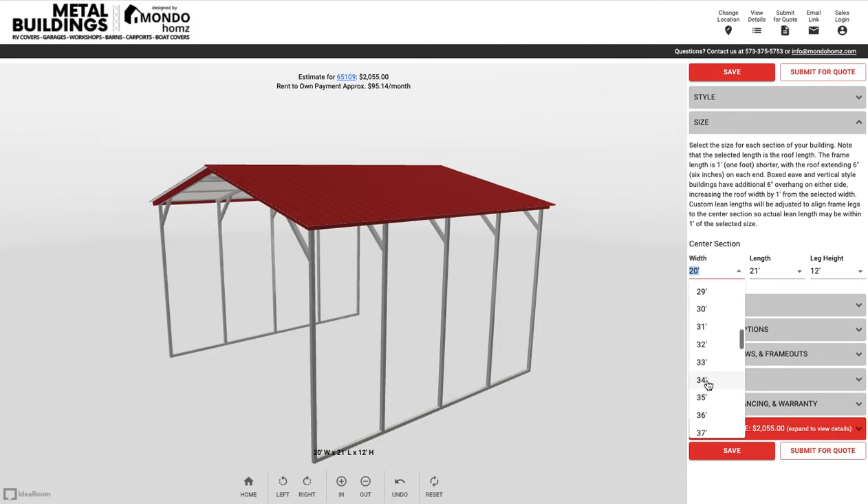So let's get building here. We're going to start from scratch with this building and change some sizes first. I usually go up and talk about the roof, but I want to look at the different sizes here.

Let's start with the size that we end with. You can see here the truss system on a 30 wide. With this particular manufacturer, a 30 wide is a breaking point, so if you go over 30 wide it's a different truss system. But another breaking point below 30 is 24, so I want to show you the difference.

You can see this truss, or this bow, has these supports welded in. And then when we go down to 24, it's a completely different truss system.

So anything over 24, you're going to get that other style of truss where it actually has the supports welded in. This support and these supports aren't welded in, they're actually bolted in at assembly. So this is more of a bow style truss, with no welded cross members in this truss system. That is the biggest difference with these buildings.

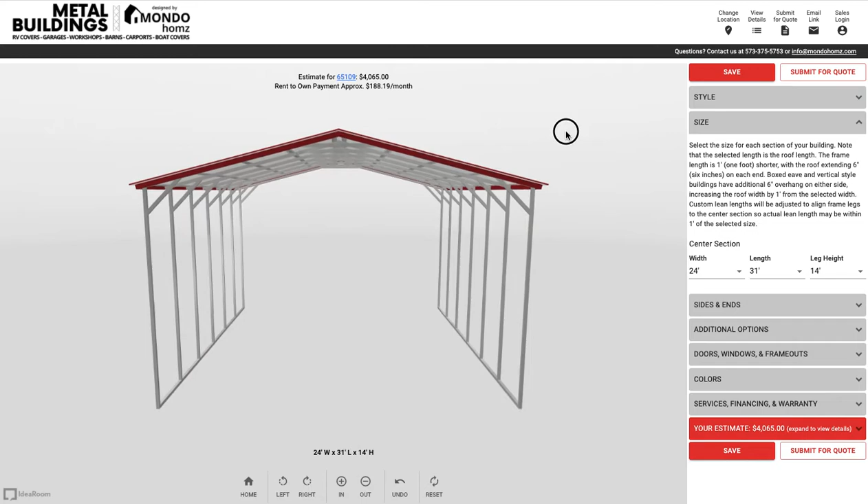And of course there is a cost difference because of the size. So you'd have a cost difference on the size of the building, but also this customer wanted to mount it to a concrete slab, so because your square footage is bigger, you're going to have more cost on the concrete slab as well. And if you were going to insulate this building, you'd have more square footage to insulate, so there'd be more cost there.

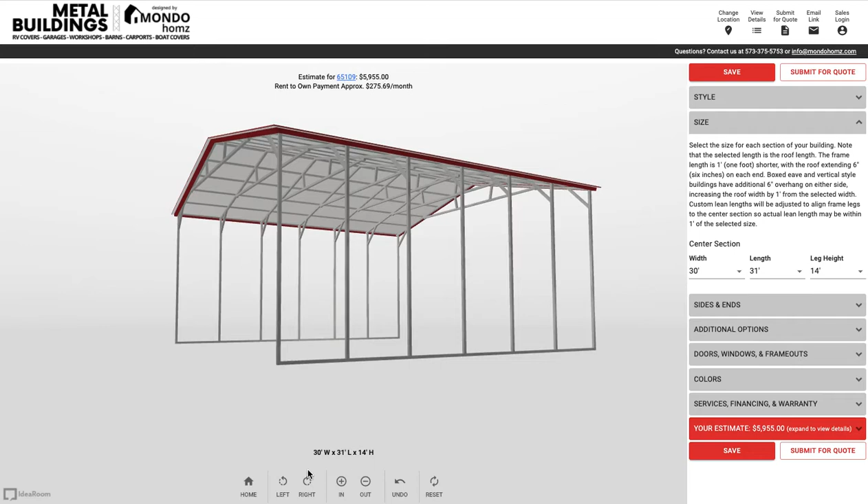So let's start with the size we ended up with, which is the 30. So 30 by 31 — again, 31 is the roof measurement from front to back, and we have 6 inches on each end. What that does is make our footprint 30 wide, and from front to back, 30 long. So it does say 30 by 31 by 14, but the footprint is a 30 by 30, and 14 tall at the eave, or the leg, or wall height.

So we want to enclose this building completely, because this person was going to use it as a paint booth. We're going to show it as that customer that called in wanted it to be.

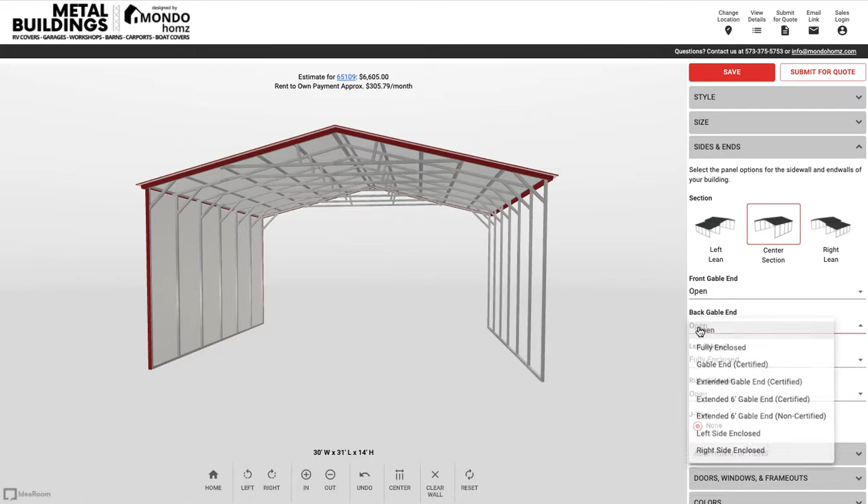Close that. Let's enclose the ends. Again, I'm always going faster than what the program wants to go.

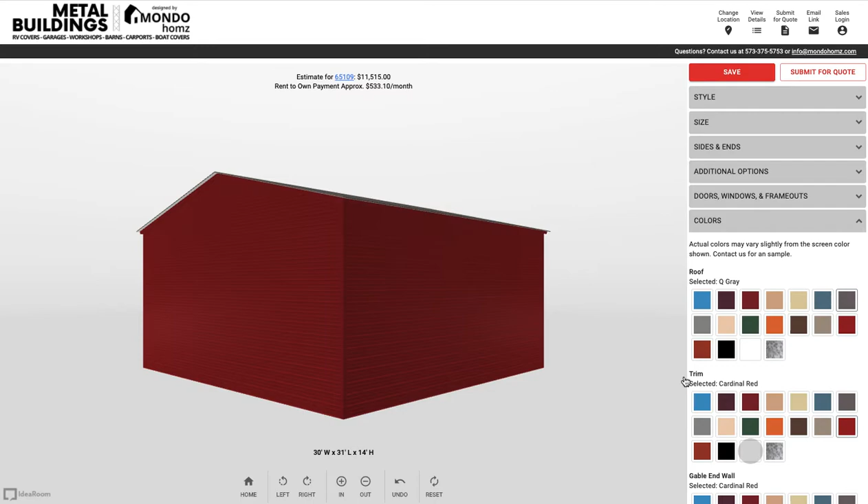Okay, so now we're fully enclosed. Now let's change the color so you can see the color of this building as we change it. We were going to do dark gray or Quaker gray on the roof, white trim, which is popular with gray, and then light gray on the walls. Okay, so here is our enclosed structure.

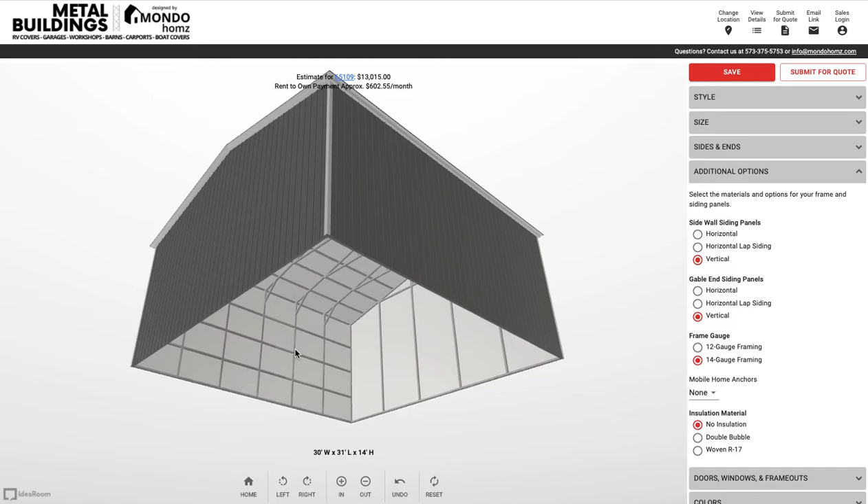Now we're going to go to additional options and change this to vertical. You know me, I always like the vertical sides. The biggest difference is you do get the cross members on the legs, so it is more of a framed-in structure. A couple reasons for that. The structure is actually free from the corrugated metal, so this is just cladding, but we do need those cross members to bolt the corrugated metal or the cladding onto the building to create our walls.

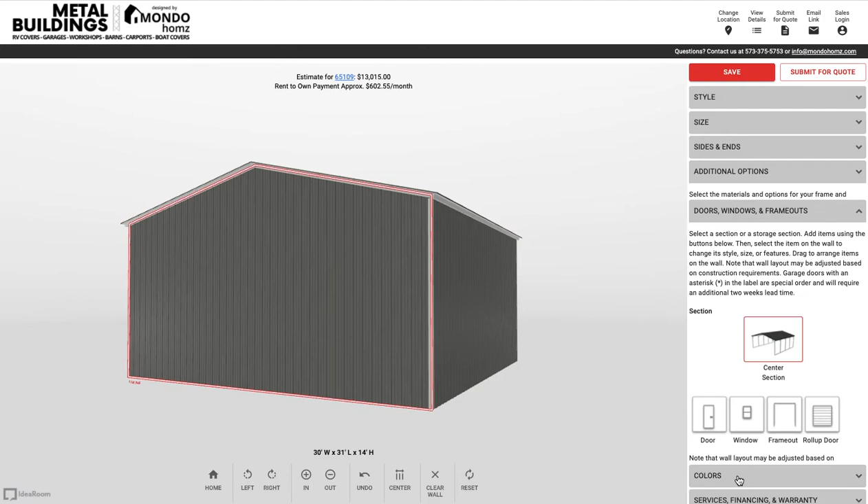Okay, so now we're going to go to doors, and we're going to do a door on the gable end, and we're going to do the 12 by 12 certified because this is a certified building. I'm going to go ahead and certify that, and then we're going to place a walk-through door here on the side so they can walk in and out of their paint booth. And there we go, pretty simple building.

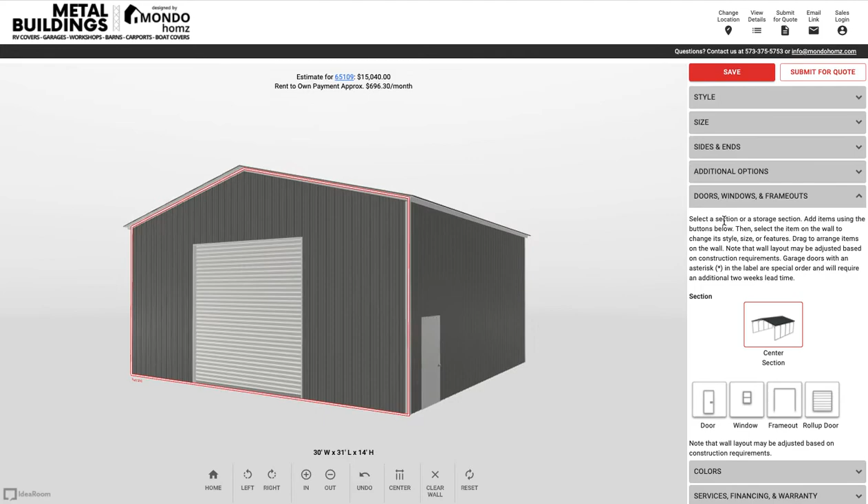I do want to go over one more thing that this customer had asked about. He had asked about fully insulating this building. Obviously they want to keep some sort of temperature control in this building, because it is going to be a paint booth, so they're going to want to keep their moisture and their temperature at a certain level, so that way their paint dries at a certain rate to get the best quality of paint job. We have a couple different types of insulation for these buildings.

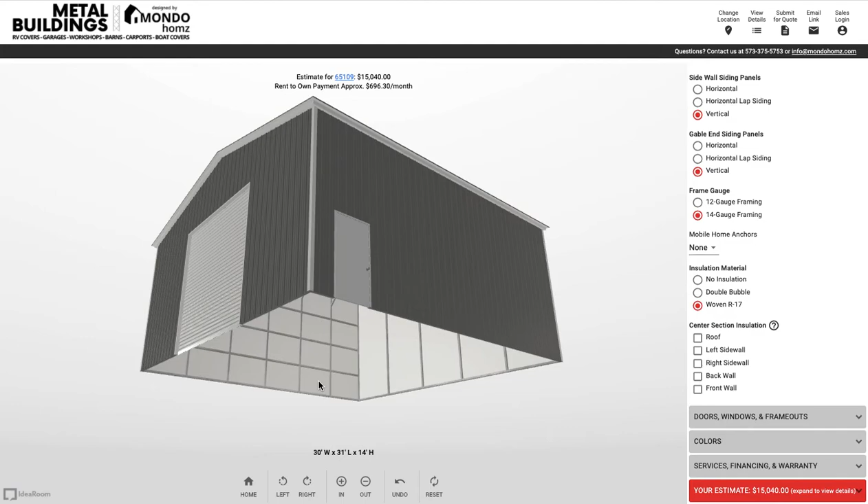We have double bubble, which is a radiant barrier that has a bubble wrap type material attached to it. What that does is it keeps this building from sweating. It will give it some sort of climate control. It really doesn't have enough of an R value to say that it does have an R value. If you're wanting an R value, our woven R17 would be what you would want to grab. It is also a radiant barrier, and it has a foam component to it that goes between the corrugated metal and the framing. That way this building is insulated.

And you can actually select to insulate just the roof, or you can do all the walls as well. And this tool, our 3D tool here, the Ultimate Metal Building Digital Designer, will actually price that out for you as you select those. So you can do double bubble, you can do woven, or you can select not to insulate it. I'm going to select not to insulate it because this customer actually talked about spray foaming this building.

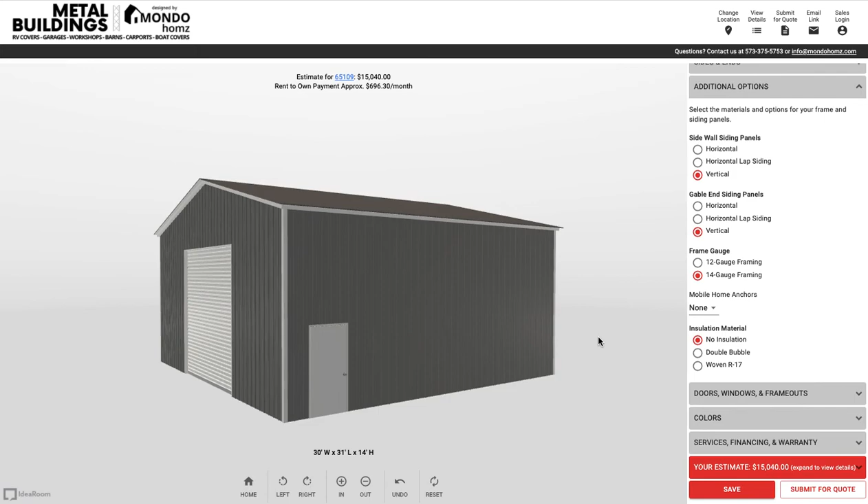Now you really want to check with a spray foam contractor on cost per square foot, also on what actually you have to do to prep before and after that spray foam. A lot of our customers do spray foam these buildings, but you want to make sure whatever use you're using it for, they're using the proper type spray foam and any kind of dressing that may have to go over that spray foam as well.

So this is our building, a 30 by 31 by 14. It is a paint booth for our customer.